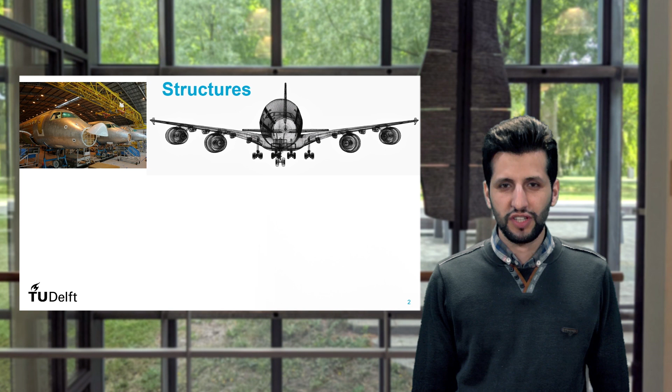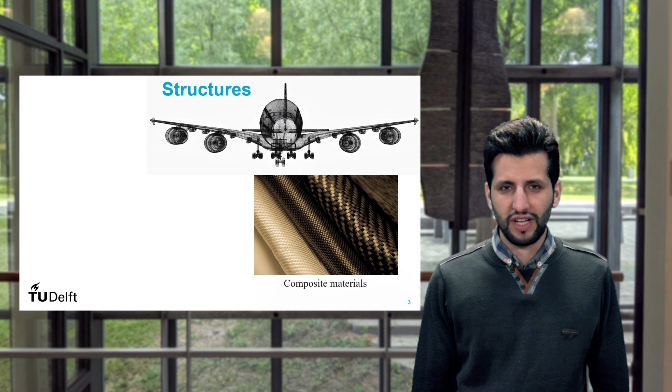The structures are the basis of aerospace, civil, automotive, and many other important industries. To build these structures, conventional materials such as steel and aluminum to the advanced ones like composite materials are used. Nowadays, composite structures are used in many aspects of industrial structures due to significant advantages over isotropic materials such as greater strength, stiffness, directional properties, and lightweight.

But due to their anisotropic behavior, the failure modes of these materials are more complicated than those of isotropic ones. In fact, composite structures may suffer a variety of damages that are not common in metal structures. So, despite the many benefits of composite structures, such as high specific stiffness and strength, it's likely that composites suffer from various defects such as cracks, delamination, disbond, inclusion, and so on.

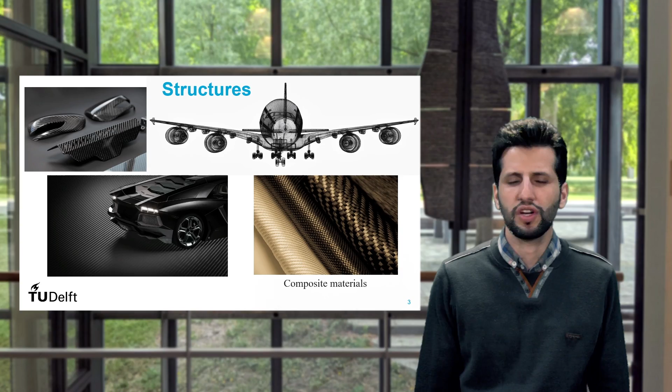With multi-advanced materials, new manufacturing and joining techniques were developed. Moreover, we still have to overcome some challenges related to their application, such as the uncertainty in the prediction of their remaining useful life, since these materials present complex damage modes like delamination, matrix crack, fiber breaking, crack propagation, debonding, and others. In addition, it's still challenging to determine their quality control since mainly composites and polymeric materials present significant effects in their mechanical properties due to several environmental actions.

In order to ensure the use of these new materials and joining techniques in primary structures, different approaches can be implemented to monitor their structural state. Getting inspired by the human body and nervous system, sensors have been implemented in components to get real-time or on-demand information about the structural health state. Then, the acquired information can be saved and analyzed by the brain, that is the acquisition system, and then related processing software.

Applying structural health monitoring methods, it's possible to increase safety and reliability of the monitored components. In addition, it aids in saving life cycle costs by avoiding redundant stopping for periodic inspection and increases their efficiency. Is there any way to discover and monitor these damages without an interruption in daily operation of the system? The answer is yes. Structural health monitoring is to acquire and analyze data which brings ability to observe and characterize the health state of the structure.

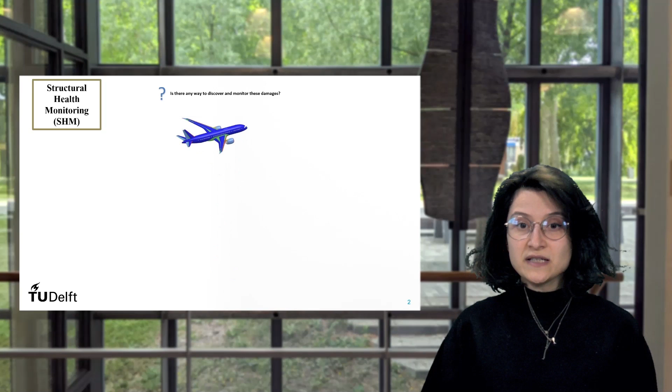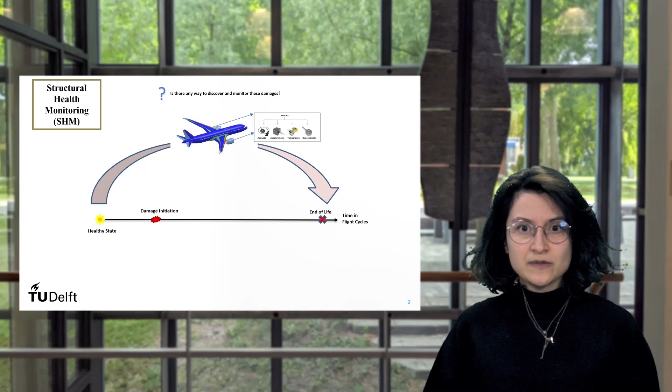As an example, let's consider the life cycle of an aircraft from the healthy state to an end of life. Aeronautic composite parts are required to be life cycle managed under damage tolerance principle and the safe life, while airworthiness is maintained through the process of scheduled inspection and, if needed, repair or replacement. However, structural health monitoring systems can provide information about the health state of the structure from onboard sensors in the sense of diagnostic, in terms of detection, localization, and severity.

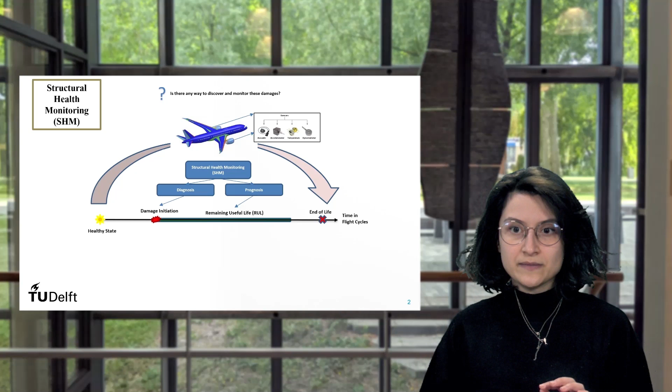Prognosis addresses prediction of remaining useful life in terms of remaining life cycles until a threshold event. RUL can be the input for condition-based maintenance strategies and also for decision-making processes. In conclusion, we can put in words that human interaction, time consumption, and overall cost can be reduced within the framework of structural health monitoring and condition-based maintenance.

When data are acquired from sensing technology, they usually come with a lot of noise. Noise can be added also by external factors, such as the environmental conditions that the structure is working with. This means that running the same experiment many times will give us different measurements. Therefore, we can say that we have an uncertainty in our data.

The uncertainty that makes each run of the experiment slightly different from the others is called aleatoric uncertainty and cannot be neglected. There is also the epistemic uncertainty, which is related to inaccurate sensor measurements or to the model's imperfections. This kind of uncertainty could be reduced by acquiring more data or by creating better models. So, how to deal with the total uncertainty? Should we reduce it, or should we consider it with our outputs as a measure of randomness?

Uncertainty is one of the reasons that there is still a huge gap between theory and practice. Models without considering the uncertainty usually are very optimistic about their outputs and often fail in real case scenarios, especially in problems that prioritize human safety, such as in the aircraft industries.

Among SHM techniques, acoustic emission is extensively used due to its advantages for in situ damage monitoring with high sensitivity and its capability to continuously inspect a relatively large area. This technique is defined as a transmission of an elastic stress wave through the material, which is usually originated from an internal source such as crack initiation and growth.

So in acoustic emission, which is a passive SHM technique, there are no external sources to excite the material, but the sources are inside the material. These sources may be damage initiation and propagation, plastic deformation, internal friction, and so on and so forth. The superiority of the passive techniques over the active ones, which need an external excitation source, is their capability for structural health monitoring while the structure is in operation.

As you can see in this figure, the necessary devices to perform this monitoring technique consist of a network of acoustic emission sensors, of course, to capture the microscopic surface vibrations of the structure and convert them to analog signals. Then preamplifiers, which magnify the intensity of the analog signals. And then the acquisition section, where the amplified signals are recorded and converted from analog to digital signals. And finally, the data processing section, where the recorded digital acoustic emission waveforms are analyzed.

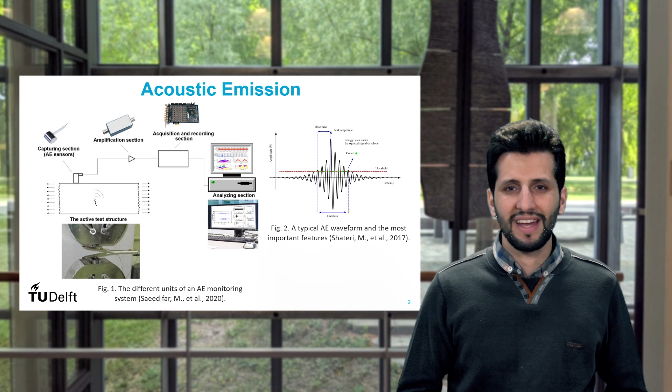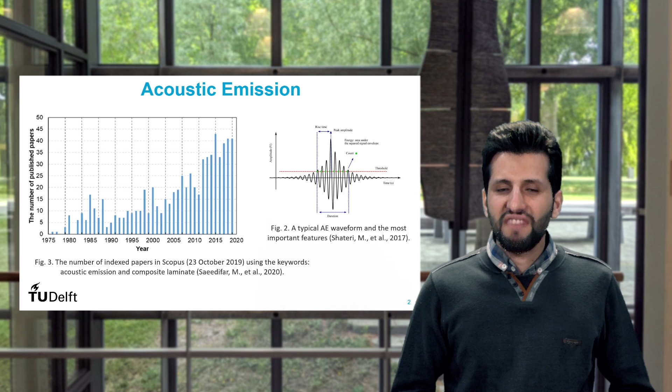Ultrasonic guided waves. In order to achieve a reliable and sensitive structural health monitoring analysis, recorded past data of the structure is crucial. For composite materials, the past data can be recorded by SHM, and guided waves are one of the active monitoring techniques that allow to conduct inspections in chosen intervals. They consist of longitudinal and transverse waveforms, and the structure can be examined using ultrasonic guided waves owing to their characteristic scattering and mode conversion originated at the structural discontinuity produced by the damage. The whole area of the structure can be analyzed by using specially arranged sensors to excite and receive guided waves.

Guided waves do not only carry the information related to damage but also contain signals that interfere because of the reflection and scattering phenomena due to structural boundaries. As a result, finding the damage-related signals is a challenging process, and therefore a data processing step is essential to achieve that information. How about optical fibers?

Among the different types of sensors available for implementation in structural health monitoring systems, fiber optics are commonly used. Their main advantages are their low invasiveness, weight, and energy required for operation when compared to strain gauges or piezoelectric transducers. In addition, they present greater accuracy and long-term stability. Optical fibers are filaments made of dielectric materials that conduct high-frequency electromagnetic radiation, that means light, with the lowest losses. The light has a guided propagation inside the optical fiber's core, obtaining total internal reflection between core and cladding.

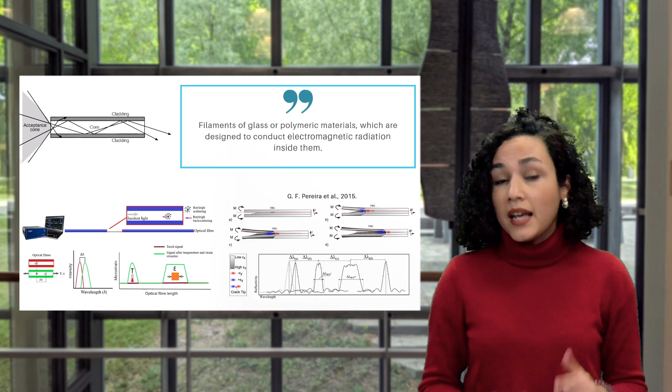So, when optical fibers are applied as sensors, they produce modulated optical signals that can give relevant information about the health state of the structure by variations in the signal response. There are two main types of monitoring using optical fibers: by local or distributed sensing mechanisms. For example, if we have a crack propagation inside the structure, the main response of the optical fiber signals will change in intensity and position, giving us relevant information about the damage propagation.

The idea of data-driven arose from the broader topic of data analytics, particularly in the business world. Nowadays, AI is applied in every application. AI succeeds when the training sets lack enough physics and rely on historical and present data to create a model to predict results, such as driverless automobiles, autopilot flights, and structural health monitoring, etc. It contains offline learning and testing of models, as well as online real-time operation of those models, and in some situations, real-time updates of models based on new data observed in the field. AI algorithms can be either deterministic or non-deterministic. Machine learning, evolutionary computation approaches, and probabilistic methods are examples of common AI tools.

Machine learning algorithms that are commonly used are supervised, unsupervised, and reinforcement learning. In the era of the fourth industrial revolution of big data, AI is widely used in every field of composite structures, including design analysis, manufacturing, non-destructive testing, structural health monitoring, and of course, prognostics of its remaining useful life, material state, and damage modes.

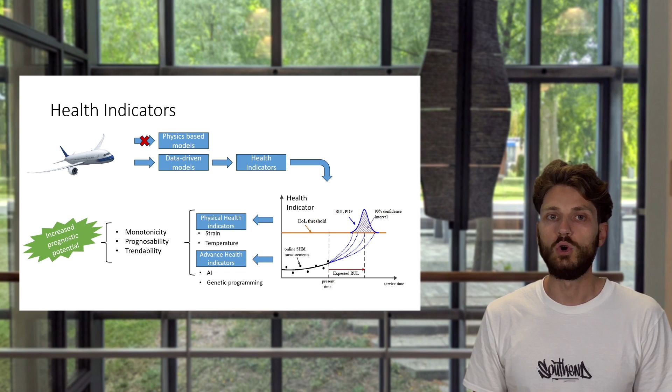Briefly, health indicators are features capable of capturing the degradation of the structure. They can either be directly derived from physical properties like strain or temperature, or constructed using advanced processing methodologies like artificial intelligence or genetic programming. Their suitability is measured using three attributes: monotonicity, prognosability, and trendability, each one commenting on a different property of the health indicators. High scores on all these attributes increase the prognostic potential of health indicators for accurate prognostics.

In structural health monitoring, we have the diagnostic and prognostic phase. So let's talk about the diagnostic phase. The main advantage of structural health monitoring methods compared to non-destructive techniques is the possibility of real-time or on-demand monitoring of in-service structures, followed by feature extraction and data analysis phase, where damage zones in large assembly structures can be identified, located, and sometimes also quantified.

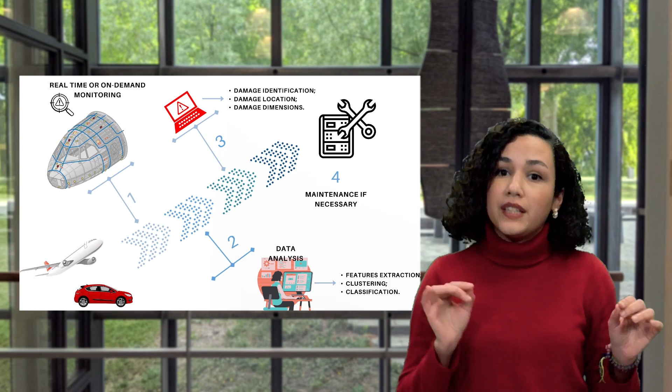Furthermore, an operational history of the monitored systems is created, allowing a maintenance plan based on the structure's actual state instead of predefined service interruptions, and consequently, a reduction of their maintenance costs can be observed. During data acquisition, generally two types of data are generated: labeled and unlabeled, depending on whether information about the actual state of the system is captured and paired with the SHM data or not.

Unlabeled data are usually abundant, easy to acquire, and don't require expert knowledge, whereas labeled data are usually acquired through costly and time-consuming experiments, also conducted by experts. This is the main reason that labeled data, especially for aerospace applications, are very limited, while an abundance of unlabeled data can be captured during the operation of the system.

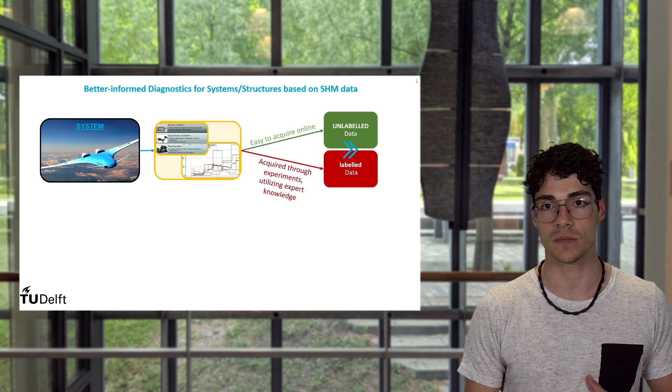The gold standard, mainly due to their high achievable accuracy when it comes to data-driven diagnostics models, are the supervised machine learning-based ones, which are trained only with labeled data. Unlabeled data by definition cannot be used with supervised learning algorithms, and thus the information that is contained in them is not utilized, leaving researchers with no other choice rather than trying to gather even more labeled data.

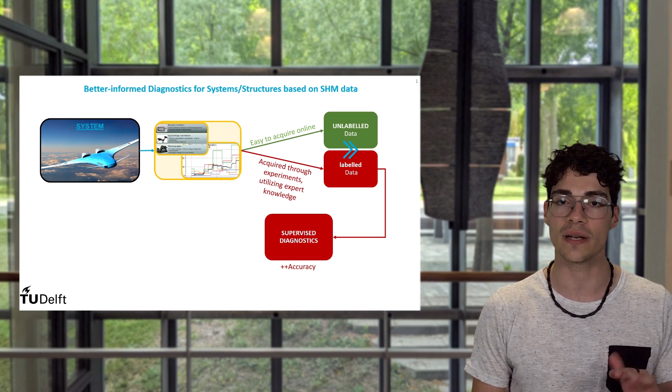This is where my research falls in, with the goal to explore and utilize the overlooked information contained in the unlabeled data in order to improve the diagnostics model's performance. To achieve this, semi-supervised learning algorithms are being explored.

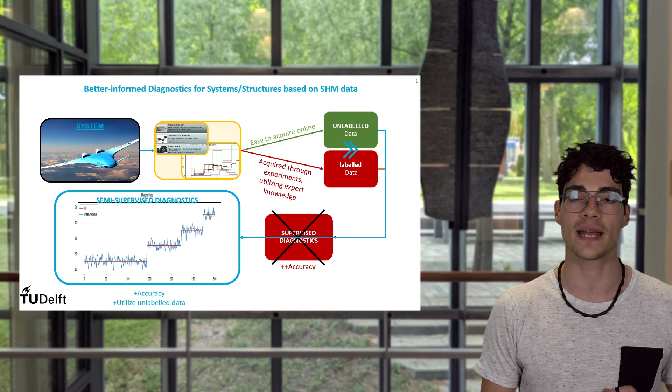According to the International Organization for Standardization, prognostic is defined as the estimation of time to failure and risk for one or more existing and future failure modes. This task is composed of two steps. The first step is to identify the current level of health, which can be considered as detection and diagnosis. The second step is to predict health indicators in order to calculate and estimate remaining useful life.

Basically, due to intrinsic uncertainties in the degradation process, measurements, operating environments, and modeling errors, multiple sources of uncertainty should be quantified in order to provide reliability in predictions and remaining useful life calculation. Instead of a single number, the decisions are dependent on the range of remaining useful life confidence. Narrow confidence represents greater precision performance than broader confidence, which reflects high uncertainty, so unsafe decisions should be avoided.

Now we have the data which is obtained through all the different SHM techniques that we mentioned so far. And our purpose is to work through feature extraction and fusion, RUL regression, and damage classification. But how? Well, artificial intelligence techniques show strong potential by their modeling capabilities of nonlinear data, so that by using methodologies of artificial intelligence, autonomous models and predictions can be achieved.

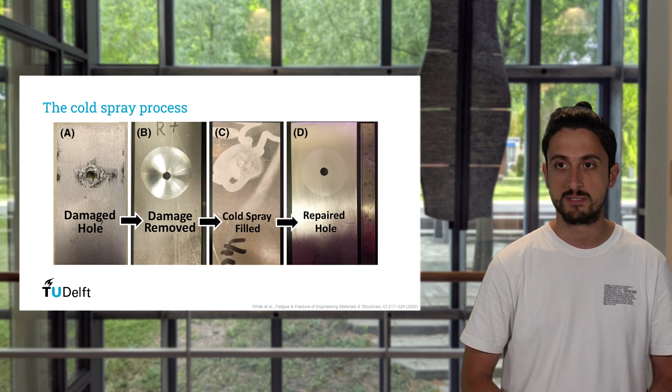But first, let's see what type of repairs we can perform with cold spray. Let's assume that we have this fastener hole with visible damage on the surface. First, we need to blend the damage, then we fill in the gap that we have created with cold spray, and finally, machining is done to meet the dimensional and surface requirements. To perform cold spray, we need a nozzle that accelerates a gas to supersonic velocity and a powder feeder that feeds the powder into the nozzle.

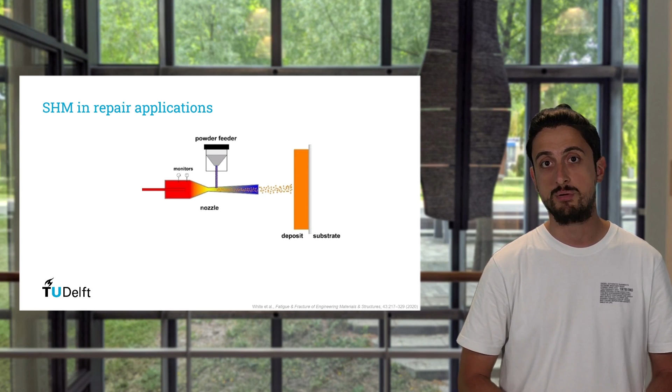Motivated by the fact that experienced users of the equipment could identify process-related problems from the sound of the process, a microphone is used to capture the airborne acoustic emission. The aim is to perform a diagnosis of the process conditions and the health condition of the nozzle that tends to wear down with use. This data is used to diagnose material properties of the deposition, such as porosity and hardness, that are crucial for the quality of the repair and consequently the acceptance or rejection of the repaired part.